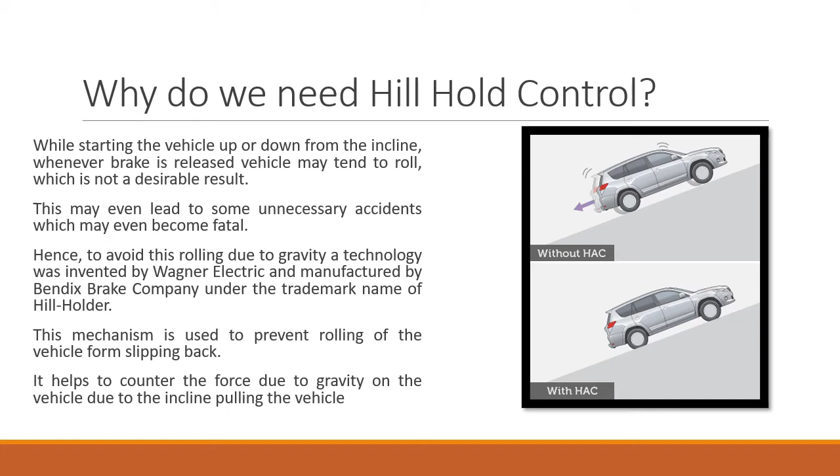So actually, what is the problem? While starting the vehicle uphill, we need to release the brake pedal, which results in backward rolling due to gravitational force acting on the vehicle. This backward rolling of vehicle may result in loss of control of vehicle, and in heavy traffic situation, vehicle may even collide with the vehicle just behind it.

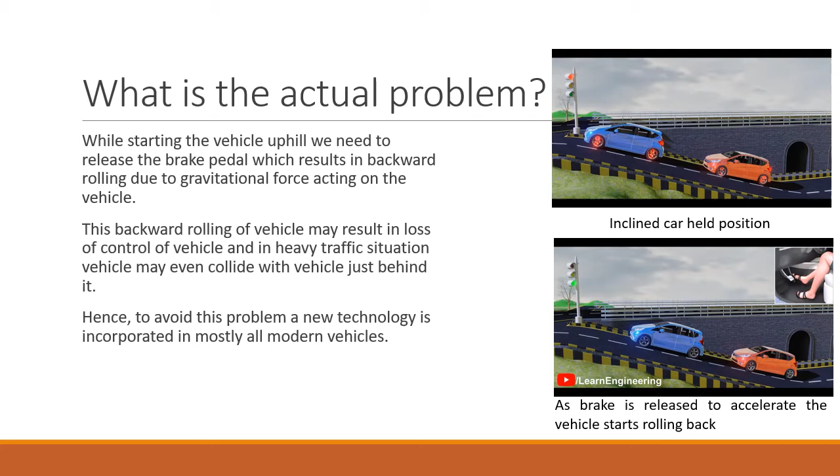So this may sometimes lead to fatal accidents if a vehicle is just behind the vehicle which has lost its braking power.

So how do we solve it? To control the rolling of vehicle, an electronic system is used which holds the brake for a few seconds till the driver can shift to the accelerator pedal, and as soon as the accelerator pedal is pressed, the vehicle achieves the start required and brakes are released.

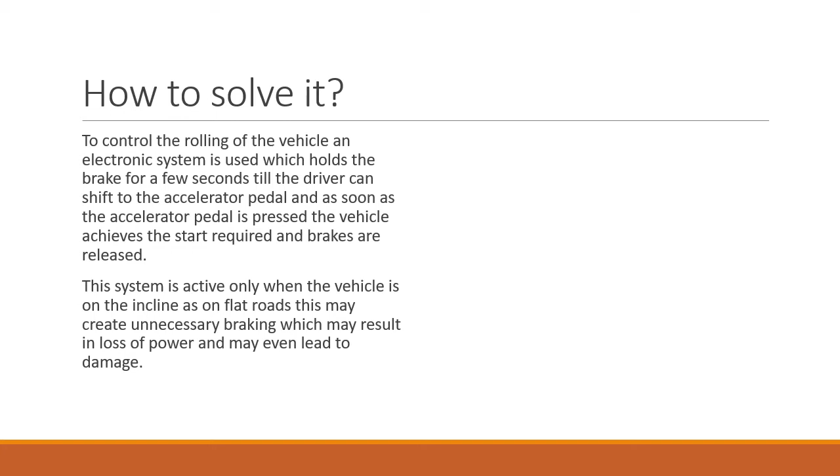This system is active only when the vehicle is on an incline, as on flat road this may result in unnecessary braking, which may even result in loss of power and may even lead to some kind of unnecessary damage. So how does a hill hold system work?

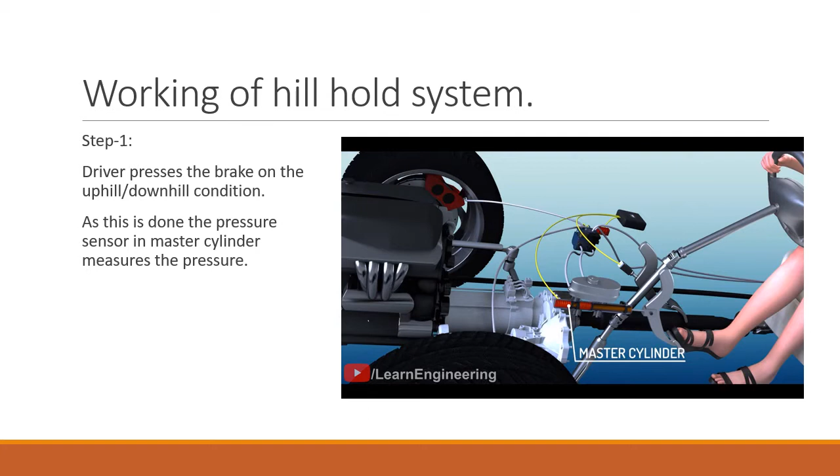The first step involves when the driver presses the brake on the uphill or downhill condition to stop his car. As this is done, the pressure sensor in the master cylinder measures the pressure required for the vehicle to hold its position. The next step involves this data being transferred to the HSA module.

HSA means hill start assist. This module has the data for pressure required to hold the vehicle at its position.

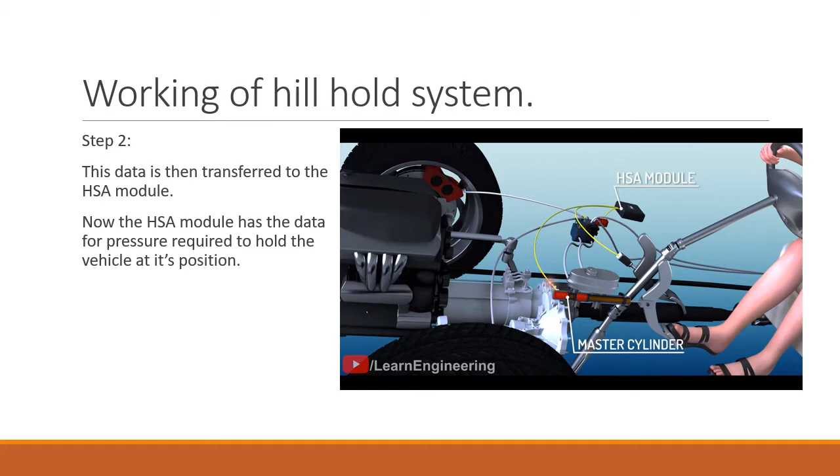The next step involves the transfer of data to the hydraulic modular unit as soon as the brakes are released. This results in prolonged braking even after the brakes are released. As the accelerator is pressed, the same HSA module detects the pressing of the accelerator and disengages the brake.

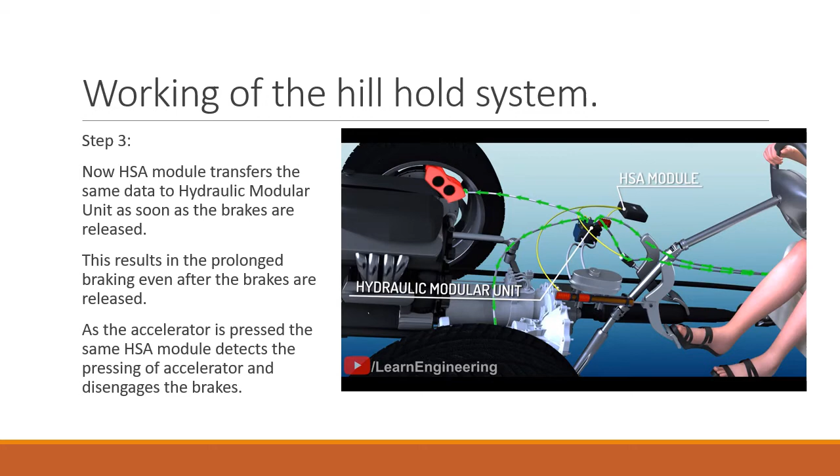So how does the vehicle know whether the HSA has to be activated or deactivated? Actually, in older models, there would be a switch which would activate the HSA module. This was very tedious in application.

Hence, to avoid this, a gyroscope or longitudinal acceleration sensors are used to detect inclination, and beyond a certain threshold the sensors are activated and this data is fed to the HSA module, which then activates the braking system.

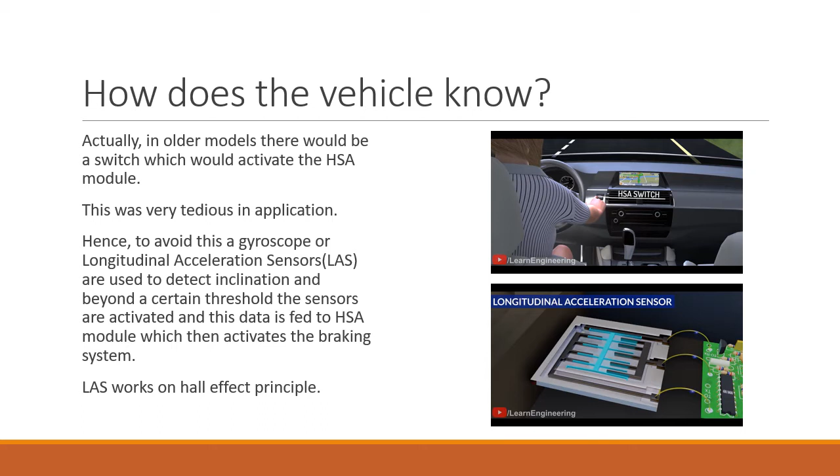LAS works on the Hall effect principle. Generally this angle is predetermined as any angle above 3 degrees of inclination. This system works proportionally, which means the brakes are released proportionally instead of being released instantaneously. When coupled with the transmission box, the entire system detects the extent and proportion at which the brakes must be released.

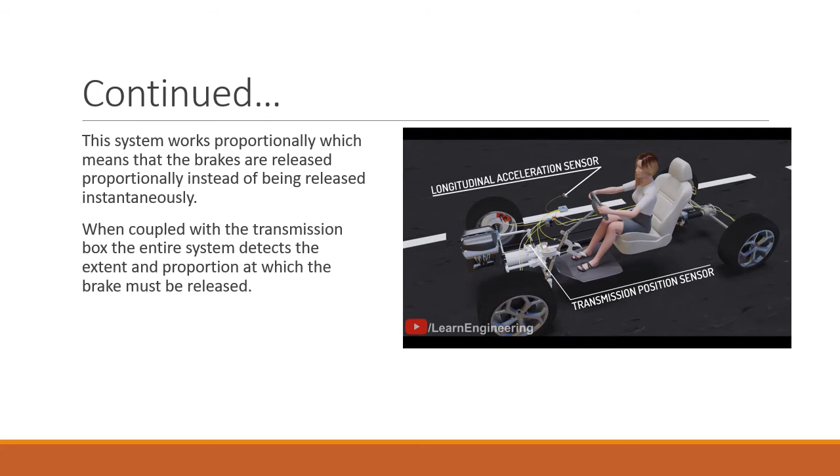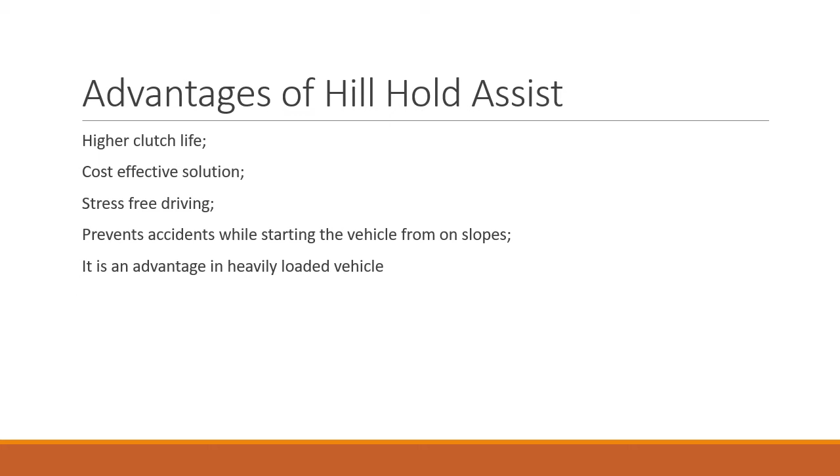So what are the advantages of hill hold assist? Hill hold assist provides higher clutch life, a cost-effective solution, stress-free driving, and prevents accidents while starting the vehicle from slopes. It is an advantage in heavily loaded vehicles.

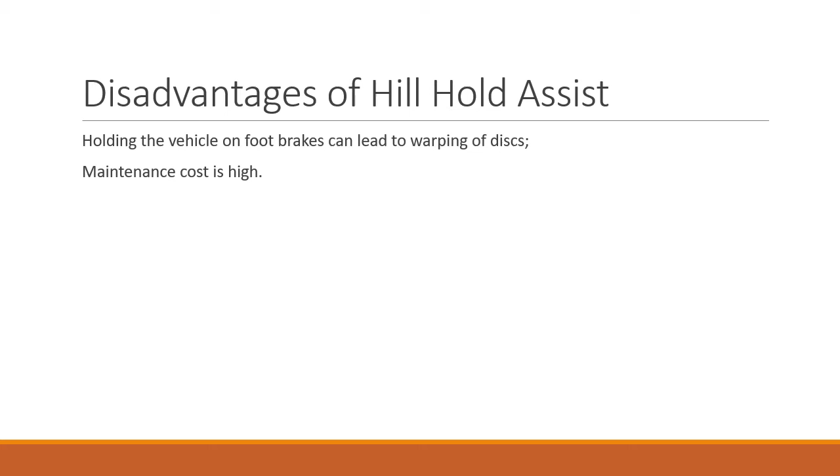So what are a few disadvantages of hill hold assist? Holding the vehicle on foot brakes can lead to warping of discs, and the maintenance cost of such a system is very high, and this is a relatively new technology, so a lot of car manufacturers don't bother to use such kind of technologies. Next up we have adaptive cruise control.

So the need for an adaptive cruise control system was that the accident rates in the years before the application of such a system resulted in some heavy crashes.

This resulted in a dire requirement of an electronic technology to be implemented in existing automotive systems. This concept of longitudinal vehicle control is known as cruise control.

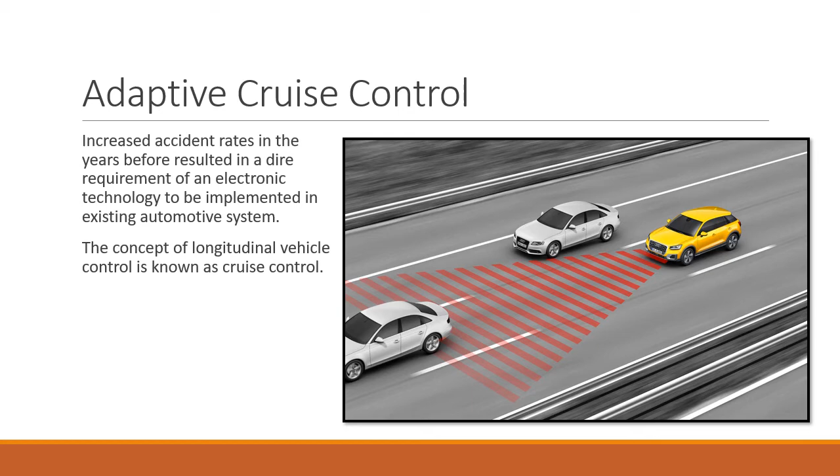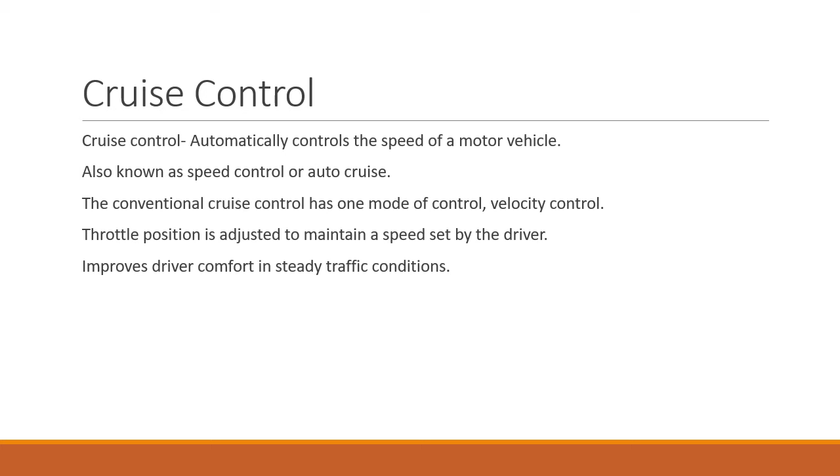So what is cruise control? Cruise control is a system which automatically controls the speed of a motor vehicle, also known as speed control or auto cruise. The conventional cruise control has one mode of control, which is velocity control. Throttle position is adjusted to maintain a speed set by the driver. It improves the driver's and the passengers' comfort in steady traffic conditions.

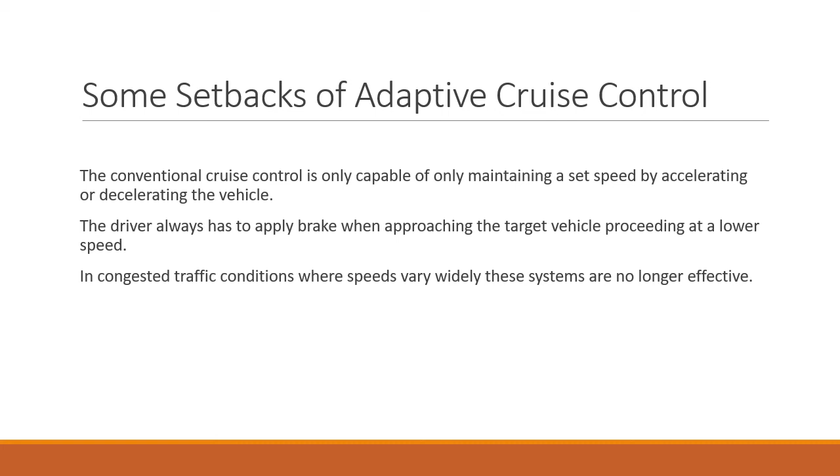So what are some setbacks of cruise control? The conventional cruise control is only capable of maintaining a set speed by accelerating or decelerating the vehicle. The driver always has to apply brake when approaching the target vehicle proceeding at a lower speed. In congested traffic conditions where speed varies widely, these systems are no longer effective.

So now what is adaptive cruise control and how is it more advantageous over traditional cruise control systems? Adaptive cruise control enhances the setbacks of the traditional cruise control system by introducing new electronic components. Collision avoidance system helps in detecting the obstacle and tries to avoid it by strafing across it. It helps the driver maintain distance from the front vehicle by controlling the engine, throttle and brake. It also reduces the stress on the driver from frequent accelerations and decelerations.

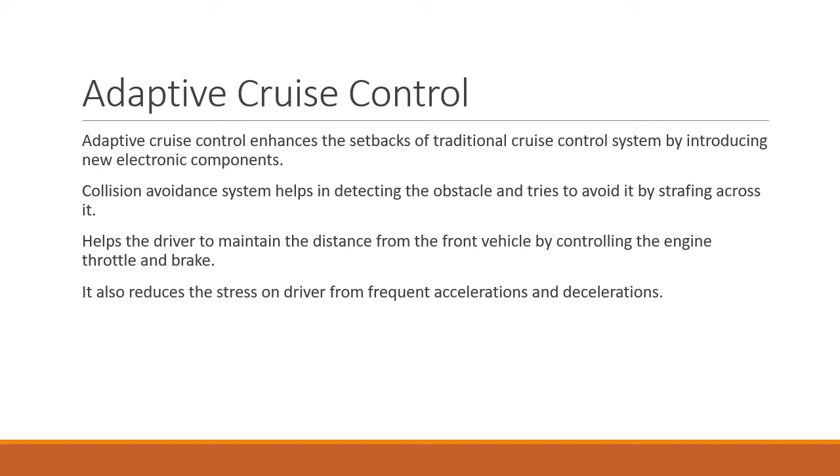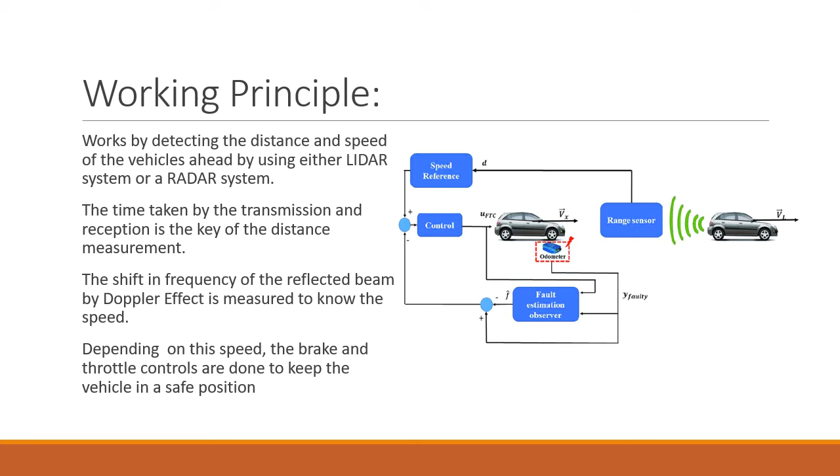What is the working principle of adaptive cruise control? It works by detecting the distance and speed of the vehicles ahead by using a LiDAR system or a radar system. The time taken by transmission and reception is the key to the distance measurement. The shift in the frequency of the reflected beam by Doppler effect is measured to know the speed. Depending on the speed, the brake and throttle controls are done to keep the vehicle in a safe position.

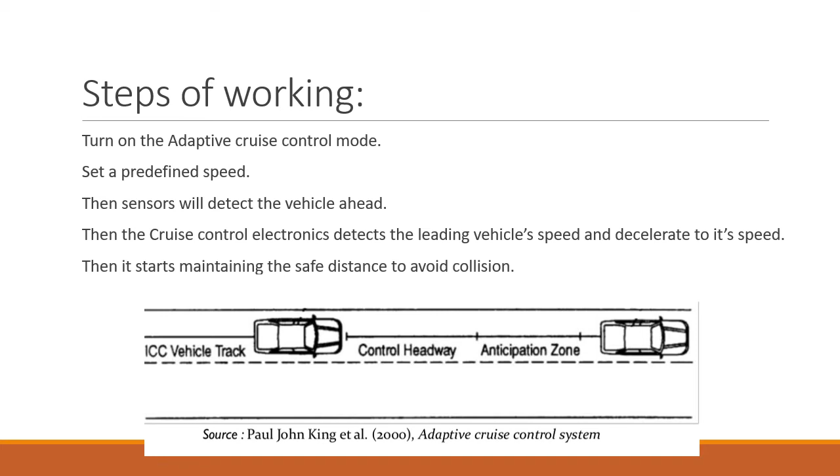What are the steps of working? First, we have to turn on the adaptive cruise control mode and set a predefined speed. Then the sensors will detect the vehicle ahead, and the cruise control electronics detect the leading vehicle's speed and decelerate to match it. Then it starts maintaining a safe distance to avoid collision.

This is a block diagram configuration of an adaptive cruise control system. When we activate the adaptive cruise control system, it takes in data from brakes, throttle, radar and vehicle speed sensors, and then feeds appropriate data back to the brakes, main switch, accelerator, speed fixing switches and speed indicators. This allows completing a loop of data, wherein the system becomes a closed loop system instead of an open loop system.

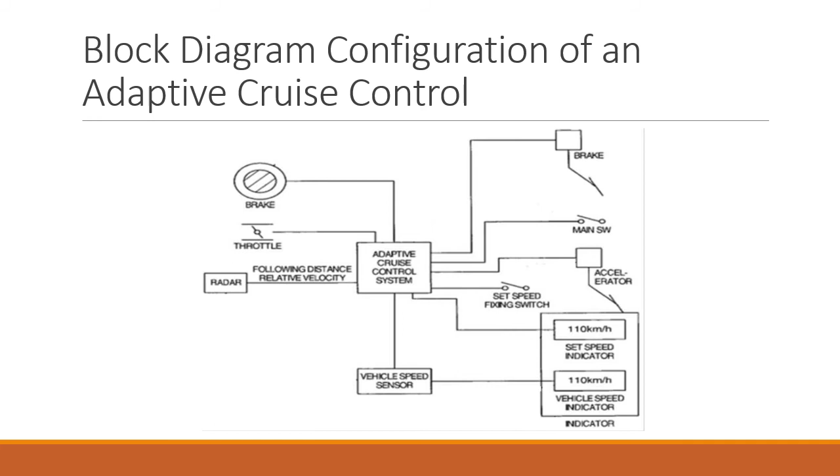So what are the components in the active system? First one is radar, then comes fusion sensors and LiDAR. Fusion sensors generally involve radar and LiDAR also, but we consider it as a separate sensor since cameras and other thermal sensors are also involved in it. The longitudinal controller receives the sensor data and processes it to generate commands to actuators using the control area network of the vehicle. Electronic vacuum actuators are also used in such a system.

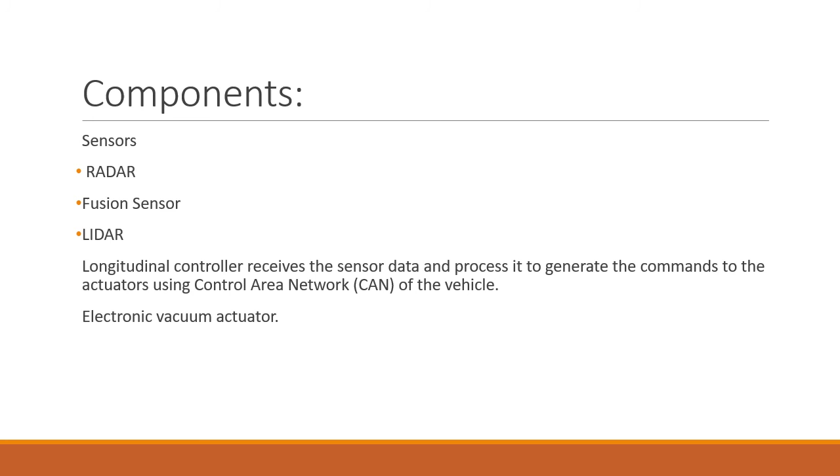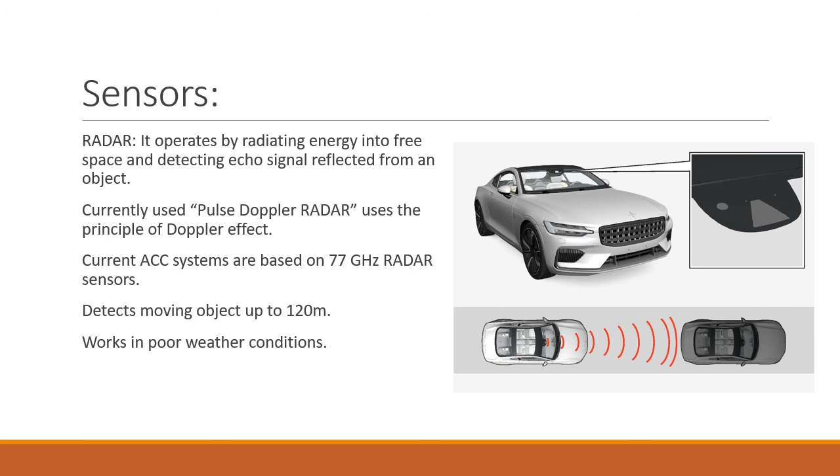Radar operates by radiating energy into free space and detecting the echo signal reflected from the object. Currently used pulse Doppler radar uses the principle of the Doppler effect. Current ACC systems are based on 77 GHz radar sensors. It detects objects up to a distance of 120 meters and works in poor weather conditions also.

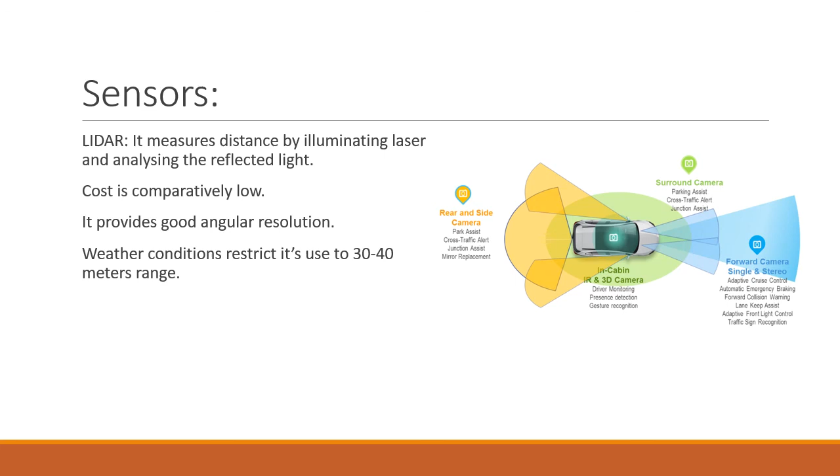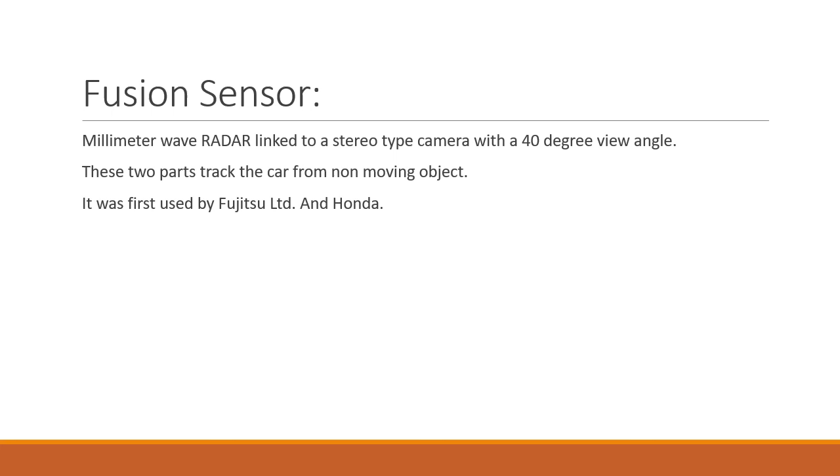Second one is LiDAR. It measures the distance by illuminating lasers and analyzing the reflected light. Cost is comparatively low, and it provides good angular resolution. Weather conditions restrict its use to a 30 to 40 meter range. Next is the fusion sensor. A millimeter wave radar linked to a stereo-type camera with a 40-degree view angle makes up the fusion sensors. These two track the car from non-moving objects. It was first used by Fujitsu Limited and Honda.

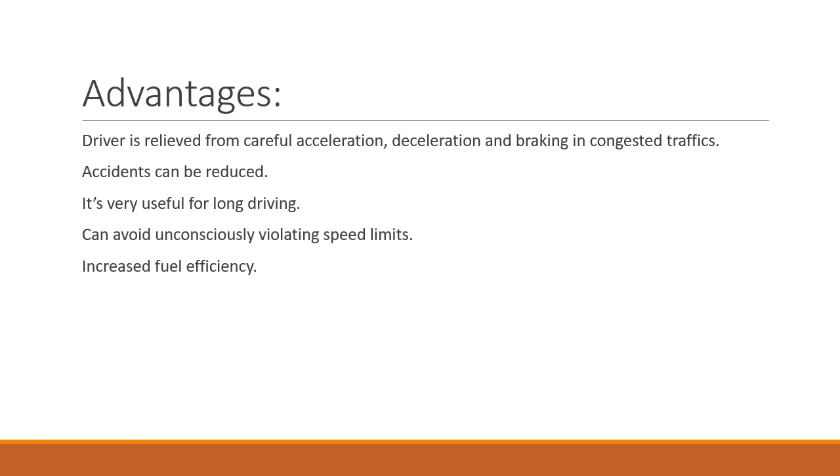So what are the advantages of ACC? The driver is relieved from careful acceleration, deceleration and braking in congested traffic. Accidents can be reduced. It is very useful for long driving. It can avoid unconsciously violating speed limits. It also increases fuel efficiency. So what are the disadvantages of such a system?

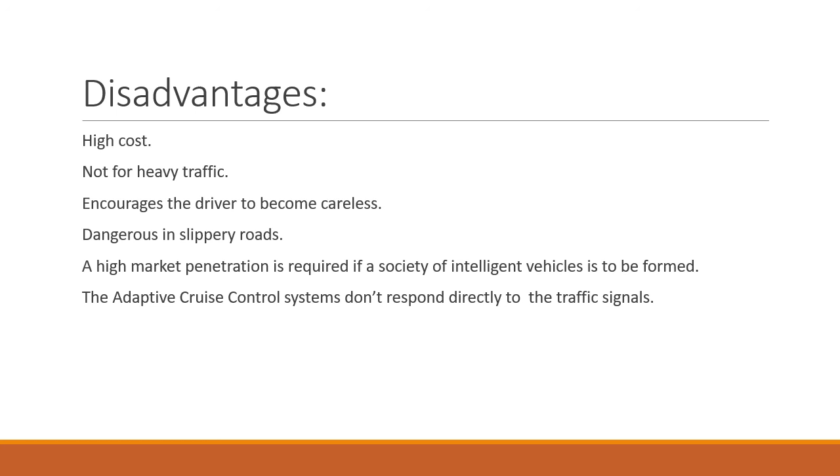High cost, not suitable for heavy traffic, encourages the driver to become careless, and is dangerous on slippery roads. A high market penetration is required if a society of intelligent vehicles is to be formed. The adaptive cruise control systems don't respond directly to traffic lights.